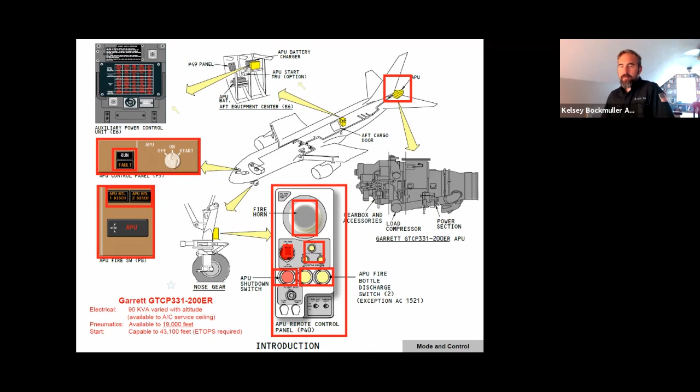Let's see, what else do we need to know? It provides 90 kVA to the service ceiling of the aircraft, and it is capable of providing pneumatics up to 19,000 feet, and it is capable of starting at 43,100 feet, which is an ETOPS requirement, which is the ceiling height of the aircraft. Any questions so far? Alrighty.

This is that E6 rack that I was talking about, and right here on the right you see the ECU, the engine control unit for the APU. This is the brain to the APU, and this is also where you're going to perform any BITE. You're going to have to come back here to the E6 rack, open up the cam locks, and interrogate this box to do a BITE check on the APU.

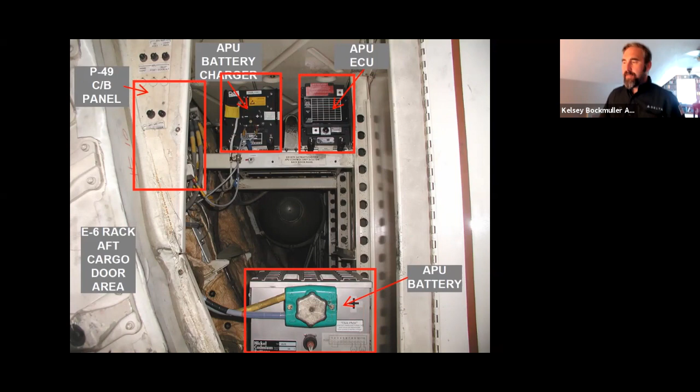This right here is, of course, your battery, and this right here is your battery charger. There's a bunch of stuff located up here inside this panel, a bunch of relays and a bunch of big heavy feeder wires. That is for starting and a couple other things. So you'll see a relay panel up there when you look in that compartment.

The APU battery weighs about 70 pounds. It is actually equivalent to a ship's battery. They are the same part number. There is really no good way to get it in and out of there. The best way to change it is to find a lift truck or a Wollard and get it right up into the door in the right spot, and you should be able to transfer it into the rack that it sits in and then bolt it in.

The second best way is to get a skyjacker. There again, the electric ones seem to work the best, and put the battery up on it and then just transfer it from the doorway of the skyjacker into the compartment. This aircraft was equipped with a few chain hoists. I don't think there's one back here for this, so it is going to be a manual lift. Sadly, you can only fit one person in there. So there again, you got to be capable of lifting the 70 pounds to get it in there.

Here is your P40 panel on the back of the nose gear. There again, shut off, bottle discharges, APU horn, and then of course the light. Biggest problem I've ever seen on this panel is the horn going bad. Pilots will write up that the horn isn't loud enough. You can hear it from the flight deck when it's going off, and they say it's not loud enough. So we've had to change out a few horns. I've done that a few times. But normally there's no problems with this panel.

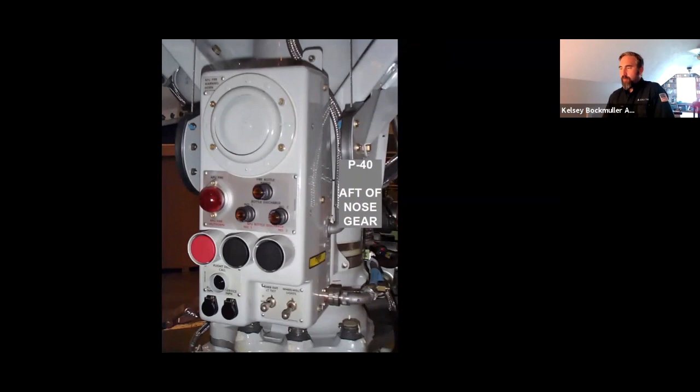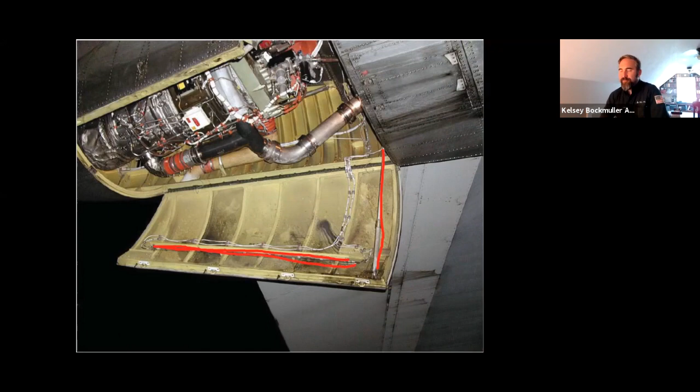This is also pretty thin metal up here, guys. It's really easy to dent and bend. So keep that in mind also.

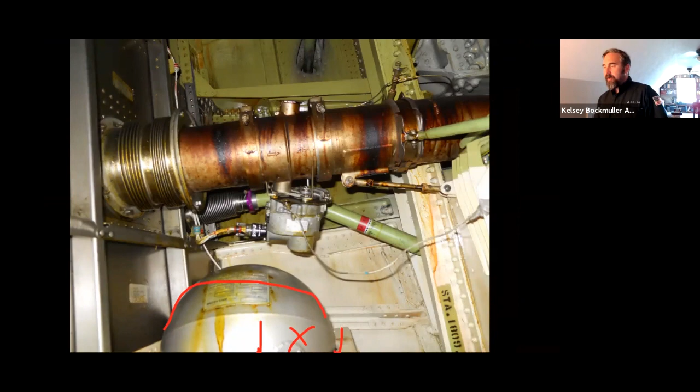And then this is the APU bleed air duct. This is the air duct that we're getting air from our APU on. This is the APU valve. If you look on your pneumatics panel, this is the one that says APU next to it. This is the one, when you push that button, it's this valve that opens.

And then in the background here, you can see the fuel shroud. Now, that's just a big pipe over a smaller pipe, but that is the shroud to prevent, in the event that the fuel line does start leaking, it will leak into the shroud, and then the shroud will take it down to the back of the main landing gear doors, where we have a drain mast that will drip fuel if it does have a leak.

Guys, this is a no-go item. If you have fuel coming out of that drain mast aft of the wheel well there, it is a no-go item. You cannot dispatch the airplane with that leaking.

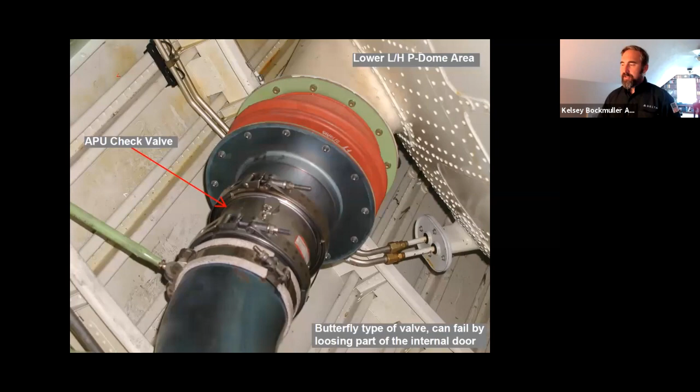This is a little further forward. You see it's right there in the P-dome area. It's in the forward stab compartment. And this is an APU check valve. It is a butterfly type valve, and it has failed in the past. They do get sloppy over time. You can imagine living back there and doing the job every day. The bearings get worn out, and the hinges get loose, and everything like that. So it has been an issue in the past, and we'll explain a little more of that as we get into pneumatics.

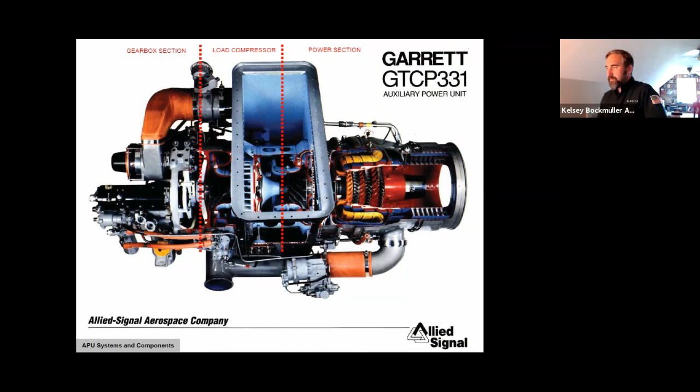Here you see a cutaway, a pretty cool cutaway from Garrett Allied Signal Company. And you can see how the engine burn is right here in this side of it, and then this is your load compressor area right here, and then of course your gearbox area. By the end of this lesson, you won't have a problem figuring this out. It's pretty cut and dry. We're going to look first at the gearbox and its accessories.

We have a cooling fan in the top. We have a generator, not an IDG, but a generator. Underneath that generator is a generator scavenge pump. We have a fuel control, an oil pump assembly, and finally a starter motor. This has got a big boot that goes on it, comes around, and then enters into an oil cooler right here. Okay, so that fan pulls air out of the inlet and runs it through the oil cooler. That helps us keep our oil at the correct temperature.

So this is real life, and here you see your cooling fan right there in front, and there you see your oil cooler, and then right here is your starter mounting pad. The starter has been removed for this photograph, and then right here you see the fuel control. Directly behind it, attached to it, is the oil pump and the lube assembly, and then of course this black thing right here is your APU generator, not an IDG.

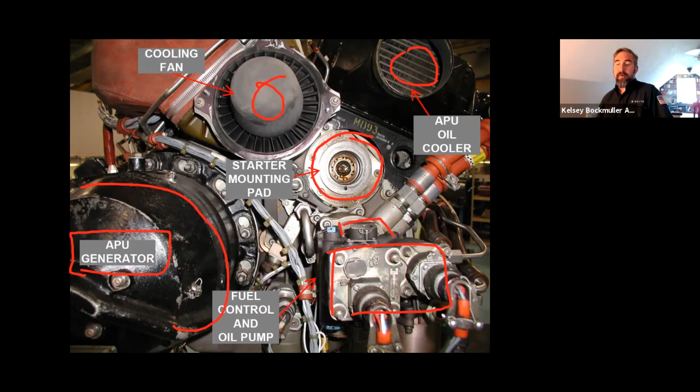Now, whose job is it to keep this generator on speed? What keeps the generator on speed? The GCU? Yeah, the ECU. The APU actually does. They run this APU at the correct speed to give us the correct kind of power we need off this generator. Okay. So they give us the correct speed.

Does anybody have a guess as to how fast this APU spins? It's quite unfathomable. Like 40,000 RPM or something. It is. It's like 40,000 RPM. It's actually 39,800 RPM, I think is what the exact number is. It's just shy of 40,000 revolutions per minute. Those 3 turbine discs back there I showed you, each of those turbine discs weighs about 30 to 40 pounds. They are super heavy. And if it's spinning that fast, I can understand why.

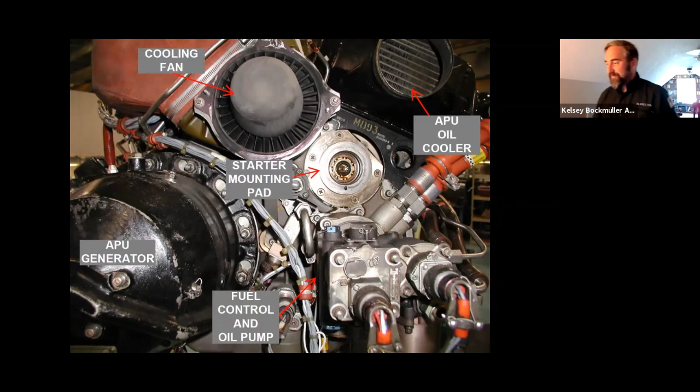It's pretty amazing. I can't even grasp 40,000 RPM. Don't even know what that looks like. Anybody? No. Okay. Yeah. Anyway. Lots of moving parts.

And we convinced them that we needed one in the training center. So a couple of the guys in the APU shop took it upon themselves to give us a stand and the APU, and they cleaned it up real good and put some unserviceable parts back on it for us. And now we have a beautiful display. We also have an ECU connected to it, an engine control unit. We can induce a couple of faults into it and make you troubleshoot it if that's what we feel like doing that day.

This APU is almost 40 years old at this point. There's not much we don't know about it. There's not much new going wrong with it. But it's been a pretty reliable unit for us. It does have its quirks. It does have its little things that we just deal with. And we'll explain those to you.

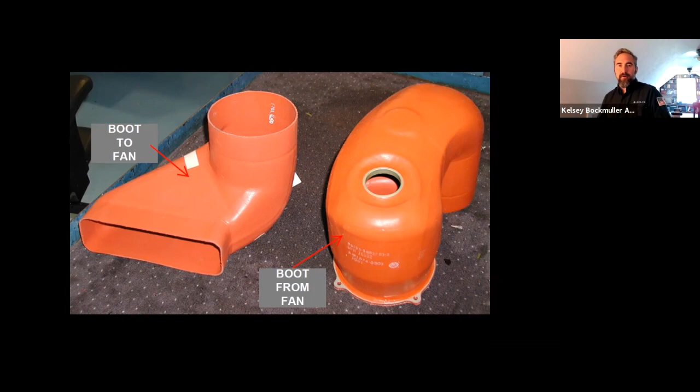These are your boots from your fan to your boot to fan and boot from fan going to your APU oil cooler. They should be intact. They shouldn't have any tears or rips in them, stuff like that.

Guys, this ECU originally came with a weight of 38 pounds. I'm told that this thing actually had glow tubes in it, glass tube transistors and stuff in it. It used to weigh 38 pounds. They've since modded it. It doesn't weigh 38 pounds anymore. And I think it's a little more solid state nowadays.

Either way, what you're looking at, though, is it does the start sequence. It's going to monitor your operation. It's going to monitor pneumatics. It's going to do shutdown control. It's going to do the BITE. And it's also going to do your predictive shutdowns.

Guys, everything on the left is what comes in. 28 volts, start on signal, ECS demand, environmental control system demand, fire, main engine start, air supply, inlet door, air ground, ADP, has the aircraft model coming into here so we know what it's installed on. Inlet guide vane position, EGT 1 and 2, speed 1 and 2.

Load compressor inlet temperature, LCIT. We'll talk about that in detail in a little bit. P2, which is pressure at station 2. PT, total pressure. I don't know what TP is. Oil temp, low oil pressure, starter power, generator oil filter, and fan valve.

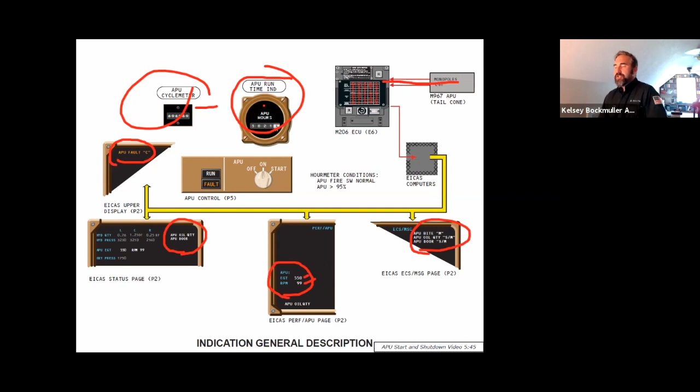Here you see the monopoles, or the EGT monopoles, and the EGT coming into the ECU and then going into the EICAS computers, again to be displayed on EICAS. We only get 2 parameters, and that's RPM and EGT. There was an upgrade for oil quantity. You can pay extra and get oil quantity. We're cheap. We can go back and check the oil. I think that's about what it comes down to.

Monopoles. We have 2 monopoles, and monopoles are going to measure the speed. We have monopole number 1 and monopole number 2. Number 1 is on the right-hand side of the aircraft. Number 2 is on the left-hand side. So do keep in mind that they do label this a little bit backwards. If you are going to change a monopole, make sure you get the right one. 1 is on the right, 2 is on the left.

There is a special socket, a monopole wrench, if you will, to remove the monopole. Looks like you could put a pair of pliers on it, a pair of hog jaws, and unscrew it. Please don't do that. It has a special knurled keyway wrench that goes on there to extract it. This monopole is about 8 or 9 inches in length, and it's got a bunch of seals along it, along with a threaded area down at the bottom, where it's going to pick up the motion of the APU drive shaft through a magnet. Any questions?

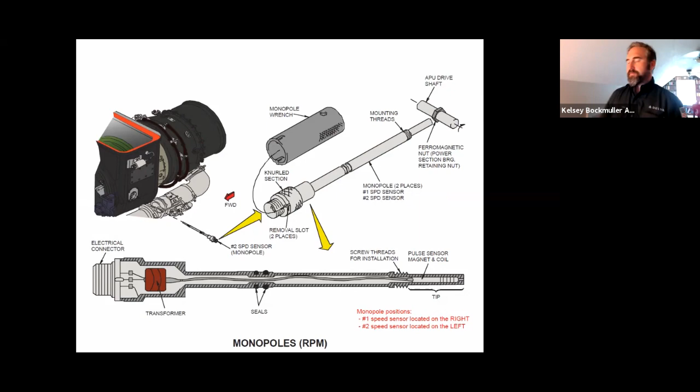This is speed sensor number 1 on the right-hand side, and there it is coming through the plenum. And then the other one's on the other side. It looks exactly the same. EGT thermocouples. We have 4 thermocouples, and we have 2 rakes. So there's 2 thermocouples per rake. If one rake fails, there's no effect on APU operation. If both rakes fail and we have not started yet, it will abort the start. If both rakes fail and we are running, it will turn off pneumatics, and it will not restart.

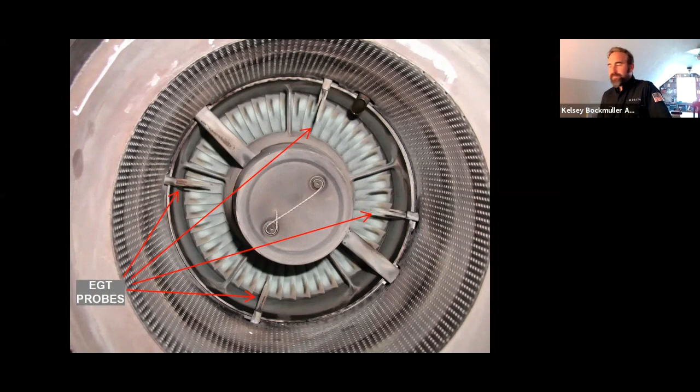It is a Chromel-Alumel sensing element, and of course, 4 probes wired into 2 circuits. There you see circuit 1, rake 1, and that's EGT number 2 on this side. And there you see the little probe sticking in the back there. Guys, this little disc right here, the disc that holds these blades, is what I was saying weighs about 40 pounds without the blades. That compartment is literally about the size of a large coffee can. Any questions on speed or EGT?

Guys, if you lose both monopoles, it's going to shut down. If you just lose one, it'll keep running. If there's a disparity between the 2 monopoles, it's going to assume it's at the highest one. Same with EGT. If there's a disparity between the probes, it's going to assume that it's on the highest probe.

Okay. Next up is lubrication for your APU. Guys, it's a pretty simple lubrication system. We do a couple of things here that I'll point out. The lube pump is connected to the gearbox, and then the fuel control is connected on top of it. So it's kind of a stacked unit. You'll see a good picture of that in a minute. We do have our cooling circuit.

We have had reports, I want to say it was Salt Lake, finding clogged oil coolers for their APU. And with everything that's happened in the last year and all the parkings out in the desert, this is probably something to keep your eye on. If you've got an unusually hot APU or it's faulting, you might have a clogged oil cooler. The air portion of that oil cooler could be filled with dirt and stuff. So keep that in mind. We did a pretty good job of taping them up, but you know how that goes.

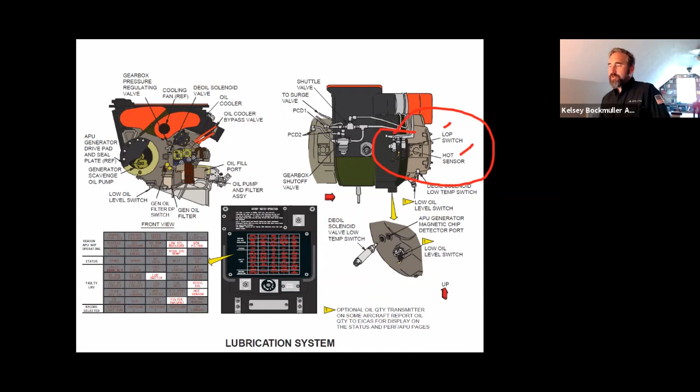On the side here, right here and right here, you're going to have the hot sensor and the lop sensor. Low oil pressure, high oil temp. They're located right next to the gearbox, just into the pneumatic section of the APU. We do have the generator, and we do have a dedicated generator scavenge pump, which is going to go into the dedicated generator filter.

Now, here's the deal. Hamilton Sundstrand made the generators and the IDGs, but the APU was made by Garrett, and they were competitors. Garrett didn't want Hamilton Sundstrand's generator to trash its APU, so they gave it a filter that is non-bypassable. If it develops differential pressure, it will actually shut the APU down. We'll talk about that in more detail. These components right here are for crankcase breather air going into the gearbox, and I'll explain that as we see more pictures.

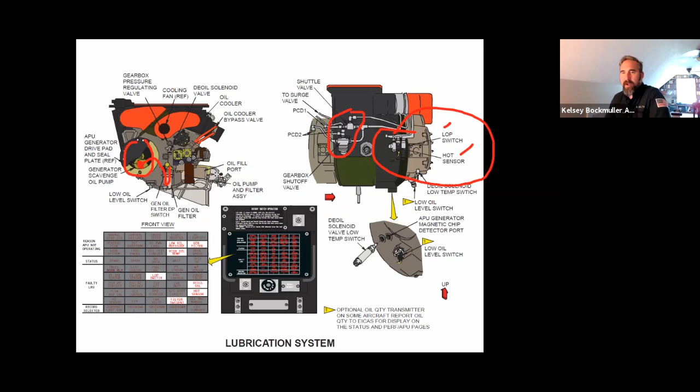The scupper is on the left-hand side, so if you drop the door, you can get right to the scupper. You cannot service the oil while it's running. You're going to have to pop the cap and pour it in with it shut down. There were provisions for pressure oil filling, but we don't do that at Delta. There is a sight glass that is virtually useless while the engine's running.

There you see the sight glass. There you see the scupper. This one, of course, needs oil. It's below the add line here. There's your full line. There's your scupper. Right here you see the oil pump area. It is mounted on the gearbox with a V-band, I believe.

Hold on. There's a weird loop in this thing. All right, there we go.

This is our oil compartment, and the reservoir is actually the gearbox. We're going to pull it down here, and we're going to run it through a pressure pump, and then we're going to run it through the air/oil cooler, and then back up and around through the filter, and then it's going to go out and do its work. All right, so we're going to send it here into the gearbox, and we're going to oil all of these things in here in the gearbox, and we're going to provide the oil to that generator.

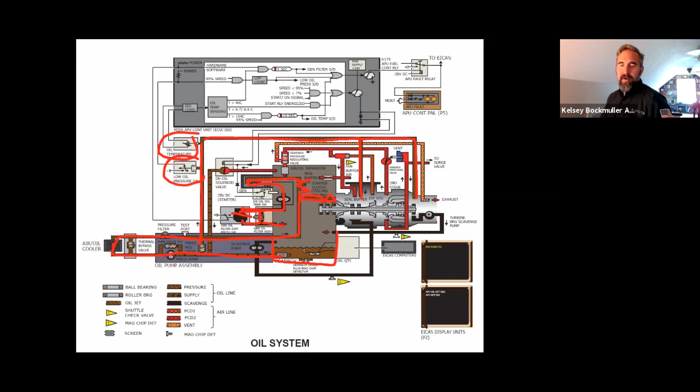And what we're going to do is we're going to fill up the top of this gearbox with a little bit of head pressure, a little bit of vapor pressure, or a little bit of air pressure, so that we keep the foaming down, so that the APU doesn't get all foamy inside there, and to help all the oil settle to the bottom. All right. Now, in addition to that, we're going to pull some of that pressure out of that gearbox, and we're going to run it into this de-oil solenoid valve that's going to come down here.

Now, what line is this coming from my gearbox? That's my supply line into my pump. So why in the world would I want to put air into my oil? Anybody? Keep it warm. When this stuff is cold, it tends to look like molasses. So if it's sitting at like negative 30 degrees for a while, it's going to look very thick and very syrupy. And what they're trying to do is not only warm it up, but actually introduce a little bit of air bubble into your oil. And by doing that, it starts to move a little quicker.

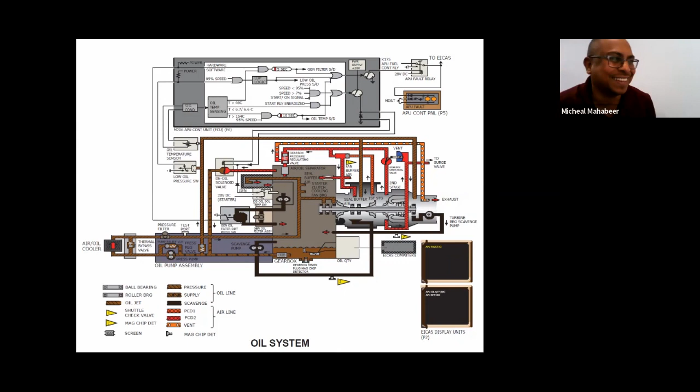And of course, I guess that probably all happened during COVID, didn't it? No. Not only did I go out and put airplanes back in service, but I took 2.5 months off. I took the leave of absence without pay. I figured I'd just sit at home, because they had us doing busy work, justifying our jobs, and I'm like, I don't do busy work. I can stay plenty busy at my house. So, yeah, I wasn't gonna play that game. Anyway, thanks for that, Michael.

Were you APUs on the other fleets, or? No, 757. On 757? Yeah, I'm on the 757, but because the two teams merged now, that's the reason why I'm doing this one, for Howard. Okay, gotcha.

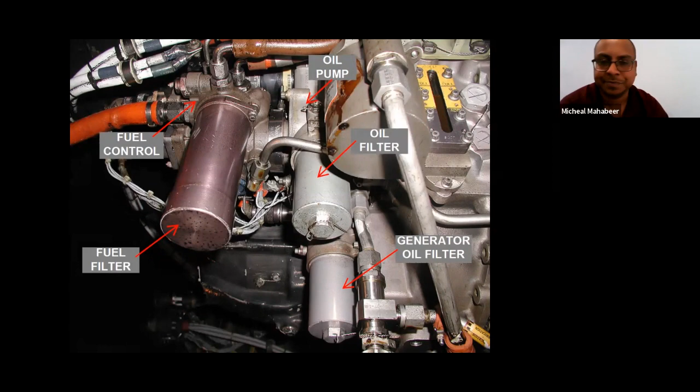This right here is your main oil filter. This right here is that dedicated generator oil filter. There again, this one is non-bypassable, and if it does clog, if it does have differential pressure across it, it will shut down the APU. The whole theory with Boeing and this APU is that if it can't make electricity, they want to shut it down. They don't want to even use it. So that's kind of where we're at there.

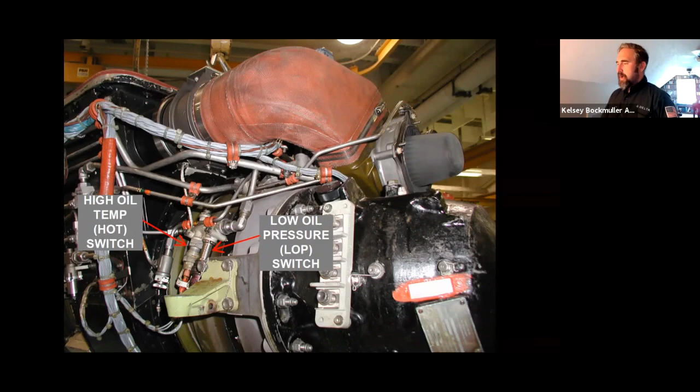What else? This over here on the side, you get a really good shot of the low oil pressure switch and the high oil temp sensor right there. So that's good. And then right here, we have our low oil switch in the bottom of the gearbox. And this is Jake's de-oil solenoid temp switch right there, the one that his buddy finds broken off. Chip detectors, a couple chip detectors. And this is your de-oil valve.

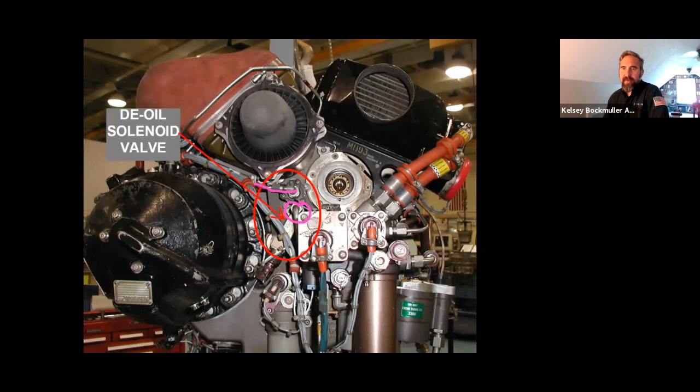All right, so this is your crankcase air going into the top of your gearbox on your APU. And then this right here, that is your de-oil valve. The next picture I have is going to be a little closer, so we're going to zoom in a little bit. And of course, there's your gearbox regulation inlet pressure right here. And then this right here is that solenoid, and it's connected to this tube. And this tube is going to take air and pump it straight into your oil pump. Right there's your oil pump.

This solenoid, if it's got low oil temperature, is going to open, allowing that crankcase air to run in there, to help give us a better shot at getting a good start, a good oil pressure after we get up to 95%. Questions, comments?

Guys, if you have a no in-flight start, because we do have to start these, what is it? Michael, you'll probably know better than me. Is it every 30 or 90 days now? I thought it was every 30 days for the ETOPS fleet. Every 30 days they do a start? They do an in-flight start? Yeah, primary altitude start.

From an altitude, and it's supposed to be at the top of descent. It's when they're still sitting up high, about to come in off the track, and before they start dropping down into either Europe or the U.S., they're supposed to reach up and hit that switch and try to do a start. Now, Michael's saying that they got instructions now to, below 10,000 feet, go ahead and open the door, just turn it to on for a little while as they're coming down.

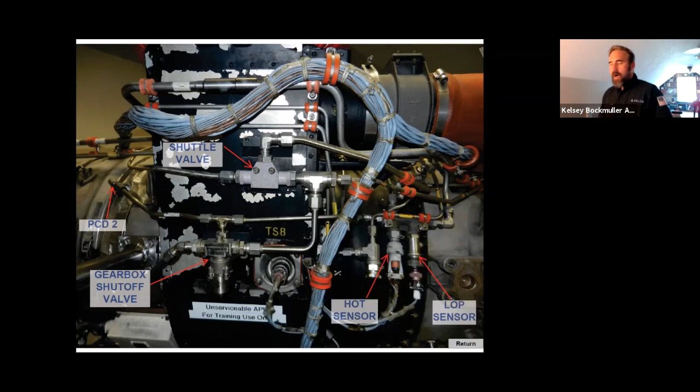I'm going to show you a couple pictures of the pressurization components. You see a couple of lines coming off the back here. There's the PCD2 pressure line coming in. I think one is right here. It comes up to the shuttle valve, and it all snakes around here. It's kind of a big mess, to be honest with you. You've got a shuttle valve here, and then you have a shutoff valve here for your gearbox.

At some point, your PCD1 pressure is not going to be enough, and they're going to have to switch over to PCD2 pressure. So that's why we have both 1 and 2, and this shuttle valve thing, and it's kind of a hot mess. But we typically don't have many problems with that. The problem normally comes with this de-oil solenoid right here.

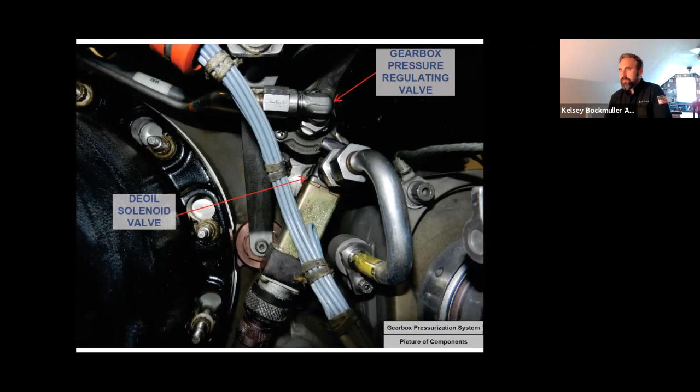Looking a little closer at this generator, we do have that dedicated scavenge pump that's going to run it through the filter before it goes into the gearbox, and it's 35 psi. If there is differential pressure across that filter greater than 35 psi, we go into a generator filter protective shutdown mode. And the temperature has to be above 46 degrees C, which is about 120 degrees, I'd guess. So as long as we're over 35 psi of differential pressure and over 120 degrees Fahrenheit, we go into protective shutdown mode. Back here there is a gerotor type pump to push that oil back into the gearbox.

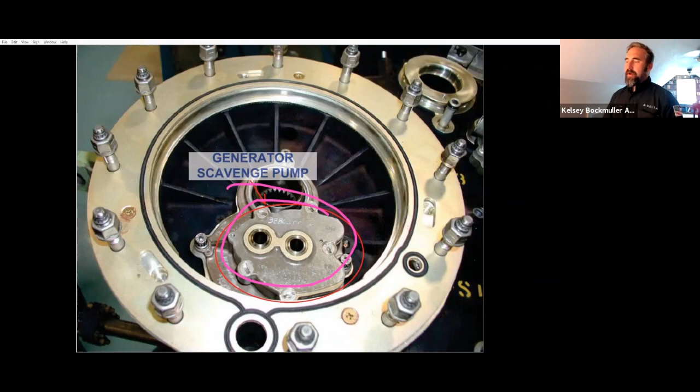And then, of course, we have a standard scavenge pump here for this mid frame assembly. This is that little tiny generator scavenge pump. The generator's been removed. You can see all the bolts. This is that pump right there. If you have a generator shut down and you pull this thing apart and the filter is full of metal, you're probably going to have to do a new pump too, along with your new generator.

This right here reminds me a lot of doing an MD90 APU generator. I don't know why. Maybe it's just that impregnated metal gasket thing. There was a picture of the rear gerotor pump. No big deal.

Moving on to fuel system. Fuel is used for combustion as well as hydraulic muscle. We have our fuel control unit, our inlet guide vane actuator, the IGV, and then our fuel flow divider and 2 fuel manifolds. One is a primary manifold, small orifice at about 100 psi, and the second manifold is the large orifice.

And then this fuel flow divider. Guys, if you've got a no start fuel issue, go straight after this fuel flow divider. I couldn't think of a more complex way to create a fuel flow divider than what they did. They've got an electric solenoid in there, 30 PSI check valves, 100 PSI check valves, continuous check valves. They've got all sorts of mumbo jumbo in there for a fuel flow divider.

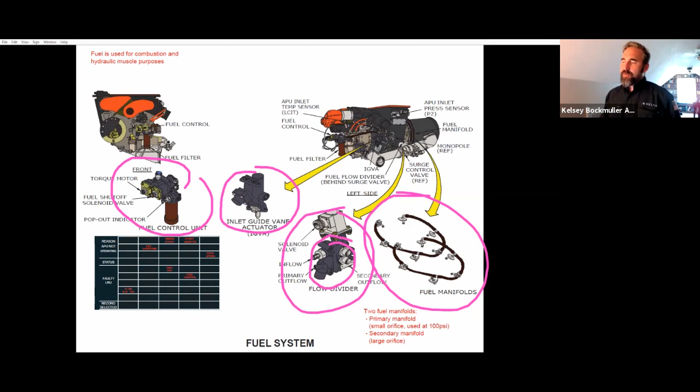If you got a no fuel start, knee-jerk reaction is throw a fuel flow divider at it. Inlet guide vane actuator. This guy right here changes our bleed air by augmenting our inlet guide vanes. And it is an electro-hydraulic servo valve that takes muscle fuel and then moves those valves. Okay? Moves those vanes to either give us air or take air away from that pneumatic section of the APU.

But on speed is considered 95%. It will have a modified acceleration schedule above flight level 30,000 for increased start capabilities. And I'll show you the starting in a bit. It runs at 100% RPM for normal electric operations and 101% when you ask for pneumatics.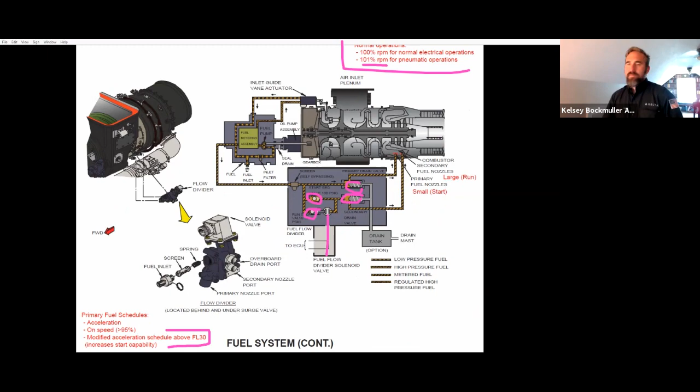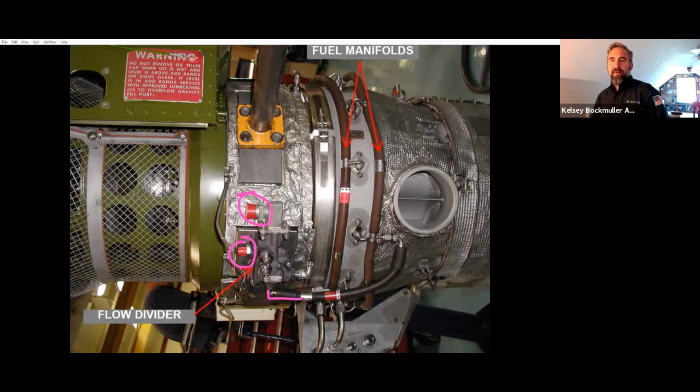This is that fuel flow divider, guys. Super easy to swap out. It's got 1 line on it, or 2 lines on it, and I think 1 cannon plug right there. 1 cannon plug right here, and there's the other line. It's held in by a couple of bolts. Super easy to swap out. There's a little closer picture of it there. It actually looks like it might only be 3 bolts.

Guys, we have a set of drains and vent assemblies here for our oil galleries and some of our components. Not really a big deal. We do have some telltale drains. You can open up and look and see what's leaking. We do have this drain mast that bolts onto the side. This is going to be different than the 757

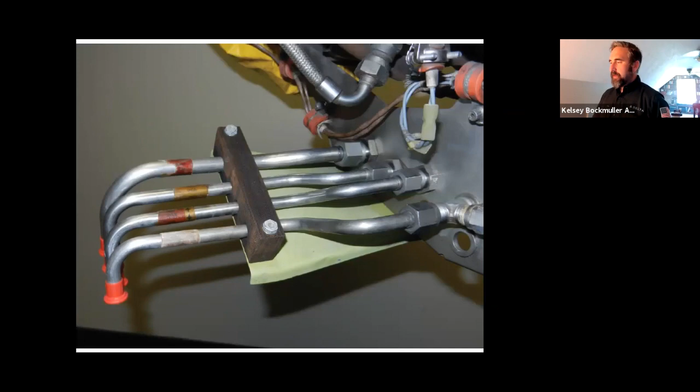as far as configuration. The air intake system, there again, is going to come in over the top, right in front of the horizontal stabilizer section box. Believe it or not, you can trim that stab all the way up. And that makes a really nice platform. You can sit up there and work on the inlet door actuator pretty easily. It helps to have somebody else with you so they can run your tools up and down rather than hucking your toolbox way up into that compartment. If I remember correctly, it takes some weird sizes, some bigger wrenches and stuff to do that door.

The plenum is a composite material, honeycomb, fiberglass, all sorts of stuff. You're going to have to inspect it during an APU change, so don't forget to do that. This is the intake plenum of the actual APU. This right here is the kiss seal that you're going to squeeze it up against. Little note, there is an inspection door right here that you can pull off, and you can look inside there without pulling the whole thing down. Guys, do take a look for debris, especially if you got a no rotation or no light off. You can pull that door open pretty quick, look for debris in there.

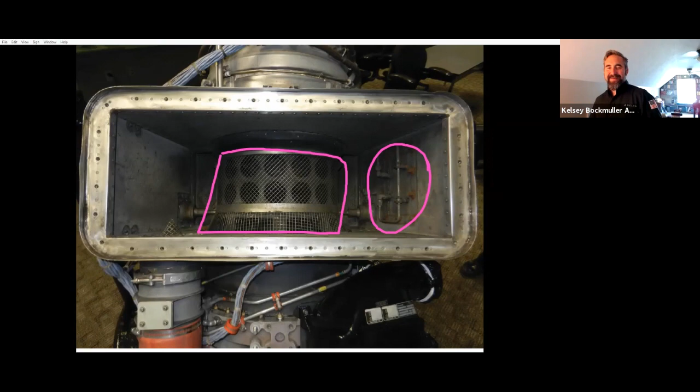The guys in the shop tell me a story that they had a carrier, a Middle Eastern carrier, send us over an APU one year to have us look at, and they'd had problems with it. And the guys got it in, they got it off the truck, they started to evaluate it and inventory it. They took the top cover off. And when they took the top cover off, they found a dirty dinner napkin laid exactly over this square area right here. The story goes that they took that dinner napkin off, checked the oil in it and sent it over to the test cell, and the test cell fired it up, and it ran just fine. Called them and told them what we'd found, and sent it back to them, unoverhauled, if you will. Guys, don't forget about the easiest thing first.

There's also a story, Abe, rolling around out there where there was a cabin cleaner standing on the back of the truck there on the back of the airplane, and they were for some reason jacked up to the right side instead of the left side. But the cabin cleaner was standing back there, and he motioned to his other cabin cleaning buddy. He says, "Hey, watch this," and he grabs an empty trash bag and throws the trash bag up in the sky. And, of course, it gets by this door and just sucks right in with the APU running. And evidently the guy got about 2 bags into it before the mechanic could get up there and get a hold of him. Tell him to stop doing that. You will find debris in these compartments.

So, yeah, definitely take a look, see what you got. The one incident I told you about checking the inlet plenum, we had a FOD out of an APU. The boys replaced the APU. They put the new one up. They fired it up and FOD'd out the new one.

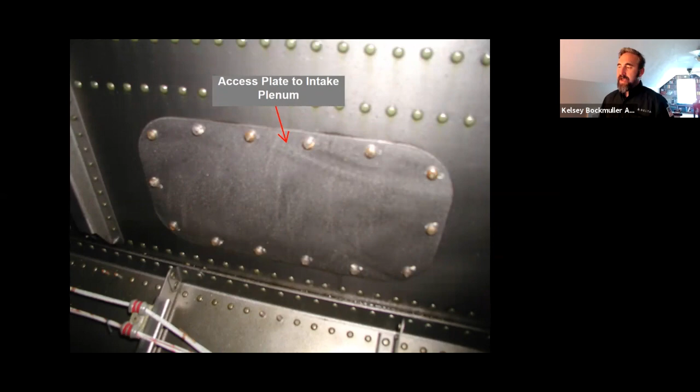And that was because of the intake plenum being disintegrated and coming apart, it eating a bunch of material from it. So make sure you do that inspection. There's also a plate here in the aft stab compartment where you can pull this down and do a look of the intake plenum there too.

This is another screen going into the fan. That's the fan screen there. This right here is damage that happens during removal, and it's one of the biggest gripes to the line guys that the APU shop has.

I worked with a guy named Dave Monroe, or is it Dave? Yeah, Dave. No, not Monroe. McIntyre. I worked with a guy named Dave McIntyre, and he left Delta North after I'd been there for a few years. We worked together quite a bit, and he was going to shop life. He was tired of working weekends and nights and holidays, and seniority at Delta North is still at 25 years. So, anyway, he was going to go to shop life, and he's in the shop.

He's in the APU shop, and he's like, "This is the number one thing that annoys us that you guys do out there." And what happens is that beam that I showed you that you got to tie off. That's how this happens. As you're lowering the APU with your winches, of course, all of a sudden they're going to go light. And as soon as they go light, everyone's going to stop, stop, stop. And inevitably, somebody's going to take it and try to shake the APU, try to get it to break free.

And what they're doing is they're actually hanging the APU on this lip right here. This lip right here has got a double bend in it. That right there is a 90 bend, and this is another 90 bend to make up the corner. It's a piece of sheet metal that has to be stamped and then heat treated and then welded in and all sorts of nonsense.

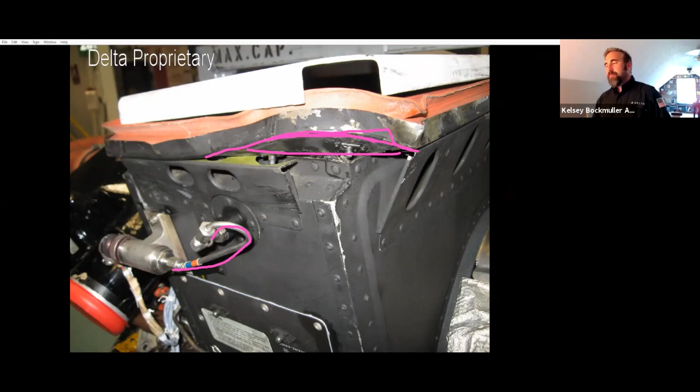Not to mention you also mess up the P2 line. But this is something that's completely avoidable on the line level when you're removing these things. So just keep that in mind, guys. Make sure you have clearances when you're pulling this thing out.

Your intake door has a switch on it so that we know when it's open or when it's closed. It is an actuator installed in virtually a coffee can. You can manually open or manually close this thing if you need to. The intake plenum is made of Kevlar graphite fiberglass composite. So there's that.

It's not a bad door actuator to change, although I've only ever done like one of them in my life. That's not to say that we don't have a bigger problem than that with them, but I've only ever had to do one. Any questions about that? Everybody good? Cool.

Next is ignition and starting, and what we have is our APU control unit, and it is going to go to the ignition unit and tell it to energize at 7% and then de-energize at 95% once we're running. The ECU is also going to get our door to open, which we see there.

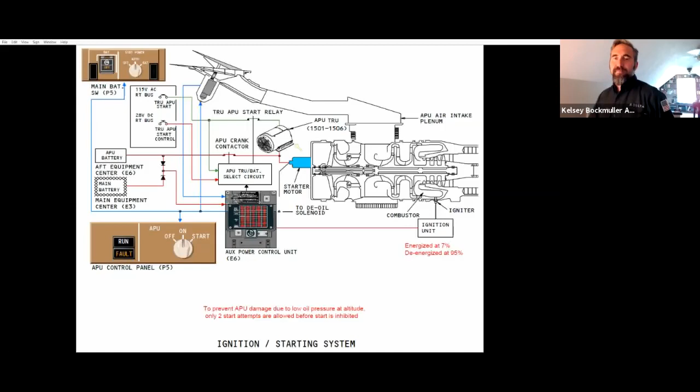It also gets power from the battery. It's going to provide the starter motor signal to start the APU. There is no TRU left on the 767. All the airplanes with TRUs were retired, so that's gone.

Let's see. This is your starter right here. It has a brush wear window. It has a crank pad that you can unscrew right here, and you can hand crank it if you're doing a borescope or whatever of the APU. There is a packing here.

Inside of here is something called a Sprag clutch that the APU shop doesn't want you messing with. It requires some special tooling and a special setup. They want the engine troubleshooting team to come out and do it. So if you do change out a starter motor and you look at the Sprag clutch and it is bad or there's a problem with it, they want you to call them out to fix it. All right.

Here's something else that's really important. Michael's probably been involved in this too. The starter duty cycle is 3 attempts, followed by a 60 minute cool down.

Guys, I know exactly how this goes. Pilot comes in, he lands, he starts his APU, it doesn't start. At some point during his taxi, while he's sitting waiting to cross a runway, he's going to reach up and try it again, because he wants his APU running as he pulls into the gate, because that's what they're supposed to do. It's not going to work then either. He's going to call it in while he's waiting at the next taxiway to get clearance.

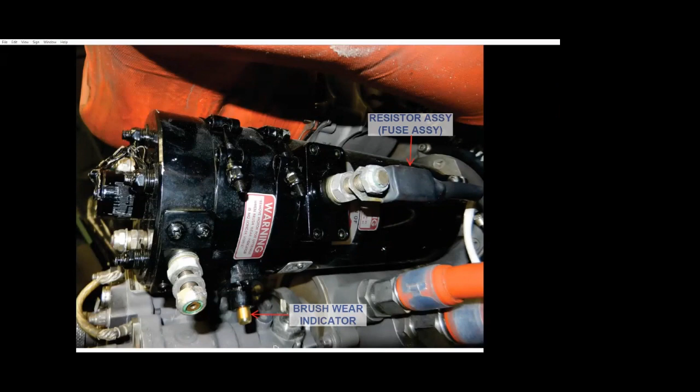This is the cover removed on the back, so that you can either hand crank it, or if you want, you can try to hand start this APU. Get yourself a big drill with the socket on the end of it, put it up there, and try to do a hand start. Remember, you're going to get up to around 40,000 RPM, so just be aware of that.

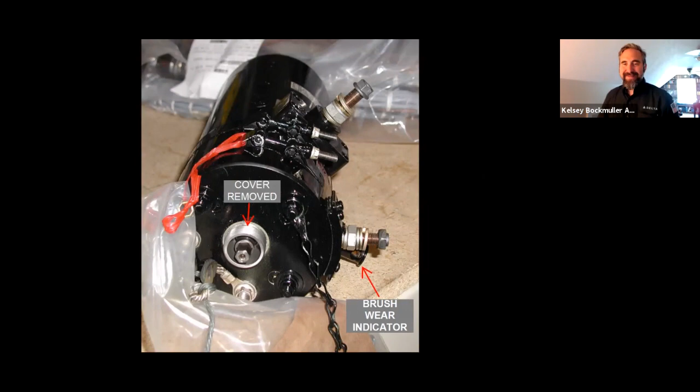I'm kidding. No reaction out of some of you. Are you even listening?

Anyway, inside of here is your sprag clutch. There's some funniness in there. They don't want you messing with it. Call it out if it's bad.

I don't like this start graphic, but I'll kind of go through it a little bit with you. First, we're going to energize the de-oil solenoid if the temperature is below 25 degrees Fahrenheit. At 7% of rotation, the ignition is going to energize and the fuel solenoid is going to come on. And then somewhere around 42 to 55%, depending upon our altitude, we're going to de-energize the starter, and the de-oiler is going to be de-energized.

At 85%, the fuel flow divider solenoid will be energized. And then finally, at 95%, APU power will be available, the ignition will turn off, and the run lamp will be on.

A failure of the de-oil solenoid valve will create a slow or hung start, but the ECU will fault the oil temp switch or starter. The ECU monitors the electrical system only. To assist in the starting sequence, ambient air is directed through the de-oil solenoid valve to de-prime the pump, unloading it for an easier start. So those are a couple of caveats there.

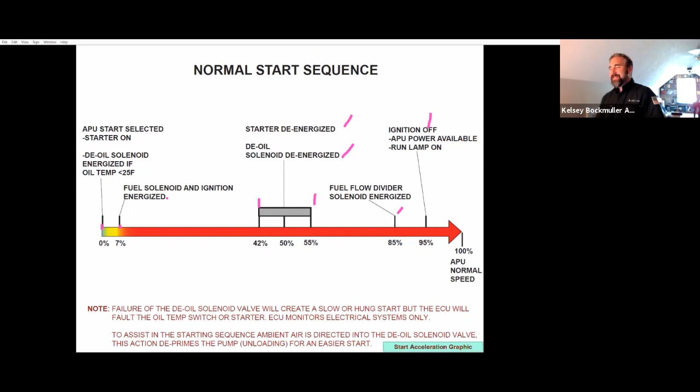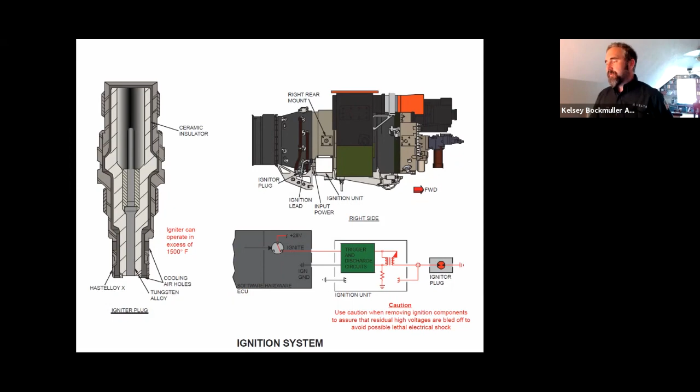These igniters are just as dangerous as a regular engine's igniter. They do put out a lot of voltage. It can be a lethal shock. There's your ignition unit. There's a single ignition plug. It does have an exciter. It is very dangerous. And that's really it for the ignition. Any questions?

Remember, this is late 70s technology here. It's not very good. It can say low oil pressure, and it's going to tell you that the LOP is bad. Is the LOP bad, or is it just out of oil? Which is it? Don't use this to troubleshoot. Use it to get your idea, to find out what it says, but then go to the FIM. Don't read anything into this faulty LRU business. Go to your FIM.

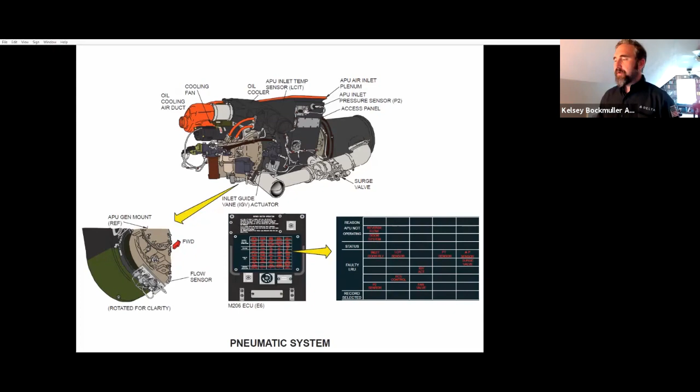We got a couple of sensors we're going to deal with here, and the first one is the LCIT. It is the load compressor inlet temperature sensor, and it is to protect the APU from reverse flow. As we take cold air and compress it, what does that temperature do? It goes up. If that air starts to back up in that compressor and this LCIT sensor gets hot, it's going to shut down the APU because it's protecting for reverse flow. It senses compressor stalls through high compressor temperatures and reports them to the ECU to initiate a protective shutdown. You're going to hear the dreaded sound these APUs make when they shut down.

If the LCIT fails, you're going to lose the sensor. It is an LRU. You're going to have no reverse flow protection, no surge protection, and they're going to use P2 for a substituted value. Now, the next sensor is P2, pressure at 2. It is an LRU. It's got a programmed value of 13.66 PSI.

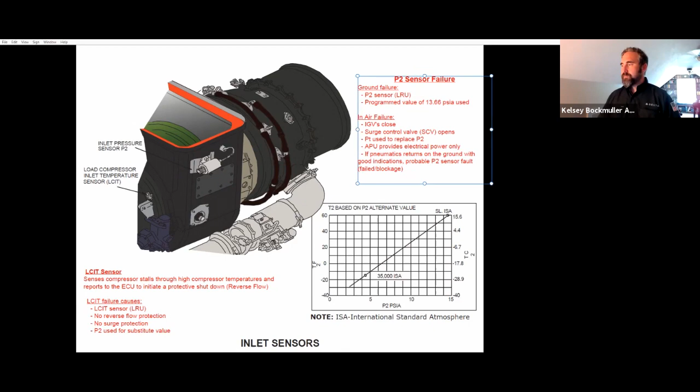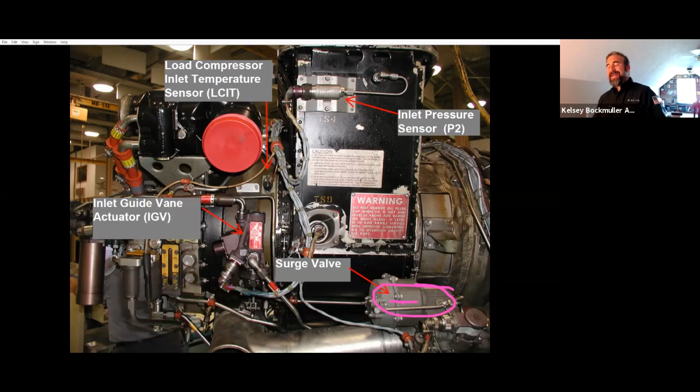It's electrically controlled, but it's powered with what? Fuel. Fuel. Yes, fuel. I'm sorry, did you just say fuel or pneumatics? It's not fuel. It is pneumatics. I'm sorry, I got distracted. It is a pneumatic actuator. It is electrically controlled and pneumatically actuated. Now, on the 767-400, it is muscle fuel based. It will run off of muscle fuel.

You'll know this sound because it's called an APU drone. And the APU will drone. It'll be wandering back and forth. It's trying to find its happy spot. And because everything's so sloppy, it moves, then it moves too far, and it moves it back. And that's what creates that droning noise. And at the same time, the surge valve is opening and closing, trying to regulate its pressure. So it kind of turns into a hot mess.

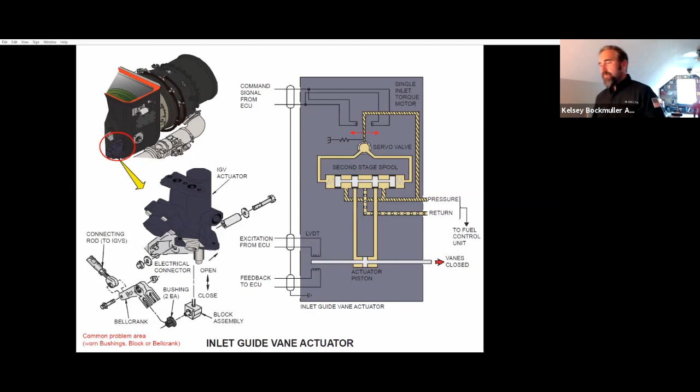But it's a pretty quick check. Guys, all you've got to do if you've got a problem with this thing is pull these two bolts out. There's one bolt there, and there's going to be another bolt down here at the bottom. And you can put your fingers on all these pieces, see how sloppy they are, and make sure they're in good shape. So checking for worn parts on this is pretty quick and painless. Highly recommended for an APU that is having issues with pneumatics.

This is that inlet guide vane assembly. It's kind of cool. I wish I had an opened up picture of it earlier. But there is a series of gears right here all the way around this unit. And then there is another gear up here. And as this arm moves back and forth, all of these gears move, and they open them all up and close them all up at the same time. It's kind of a neat little thing.

I will go ahead and tell you that you are not allowed to break this rod end off. This rod end right here stays. You might be able to get that bushing out. I'm not 100% sure. But if something's the matter with that rod, you're done. You've got to change the APU.

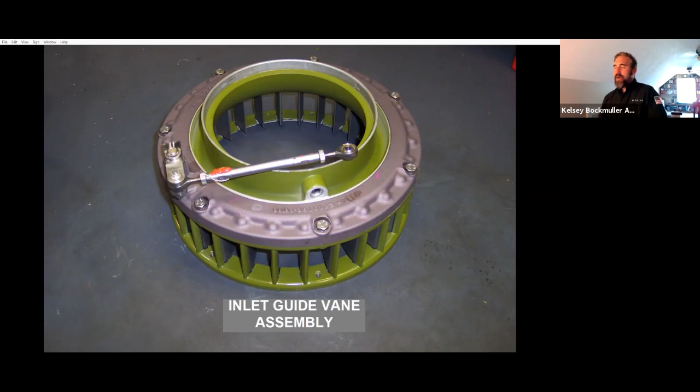Moving on to the surge system and the control, we have a differential pressure transducer. We have a volumetric chamber right here, and then we have a total pressure transducer. And what we're looking at is the volume of air coming out of our pneumatic system, and we're trying to regulate it. Okay? All of these sensors go to the ECU.

The ECU is then going to come back and give the surge valve a command. And of course, we're using muscle air, PCD2, for that. And then we're going to exhaust the extra pneumatic air into the APU exhaust. So based on these sensors, PT and PS, and the volumetric chamber there, we're going to set the surge valve position. This is known as a pallet. Okay, all the sensors are typically changed all at once.

The surge control system will fail open. APU will run, but you just won't have enough pneumatics to do anything with. If the surge control system fails closed, it'll detect reverse flow, and then shutdown will be immediately after. All right.

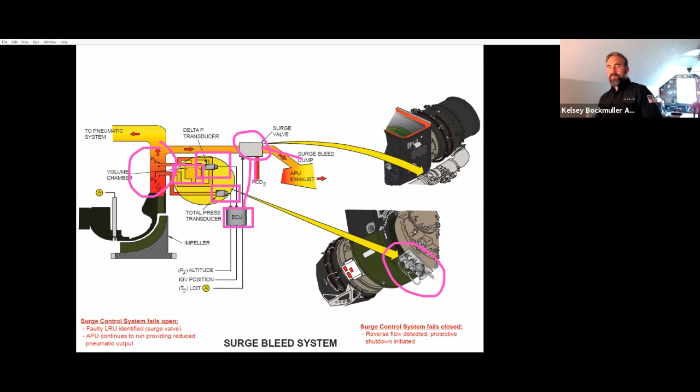So pneumatics problems, you can look at your inlet guide vane actuator, but more than likely you're coming after the surge valve or that pallet. There's a good picture of our surge valve right there. There's your electrical connector. And then, of course, you see your pneumatic lines on here.

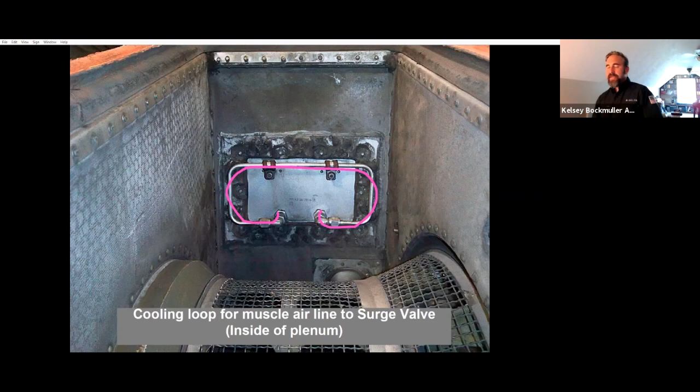This is a cooling loop for the muscle line on that surge valve right here. We're going to take that PCD2 air, we're going to run it around the APU through this cooling loop and then down to the surge valve. This is it removed. Here we are doing a little inspection of it there.

Now, it used to be that these sensors were all located and individually attached to the bottom of the APU right here. Guys, we did away with that a few years ago, and they put everything on a pallet. So now everything is one. Here's the other thing they did is they took the lines off of these sensors. Okay, so when you order this piece, you get a piece of sheet metal with all these sensors mounted on it

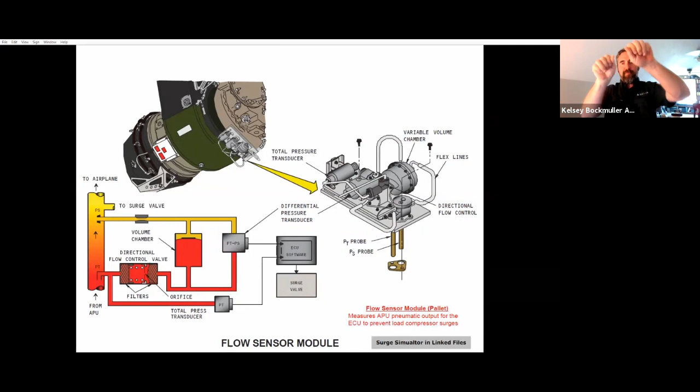with no lines. What you're going to do is disconnect the lines off the sensors up there on the airplane, pull off that pallet, put this pallet on, and then put the lines back in the sensors. Here's what they don't want you doing. They don't want you pulling these lines off because the gaskets were getting doubled up.

And the depth that this static probe would stick into the duct would now be in a different spot, thereby causing an inaccurate reading and causing the ECU to mess things up because it wasn't getting a good reading. This is something that we've seen over time, and they've changed. I believe on one airplane they had 3 or 4 O-rings or gaskets packed up in there. So of course that sensor was way down low in the duct and giving us a faulty reading.

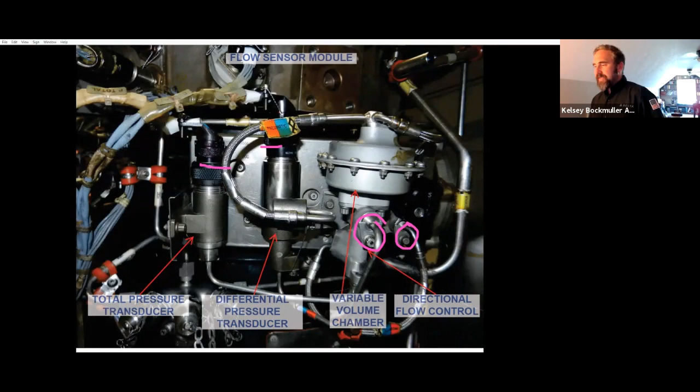Okay, that seems to be the latest and the greatest thing we've heard on this. This is the pallet configuration. These right here are the hoses that you're going to be pulling out. Right here and right here. I think there's another one. They're the Cannon plugs. But that's the pallet configuration. As far as I know, the old style, where they're all individually mounted, those have all gone away. They've all been modified.

Mike, is that something you chime in on, or was that before your time? I don't know what it is for the 767. I know the 757 that is true, and it was a legacy of Northwest. Can't hear you.

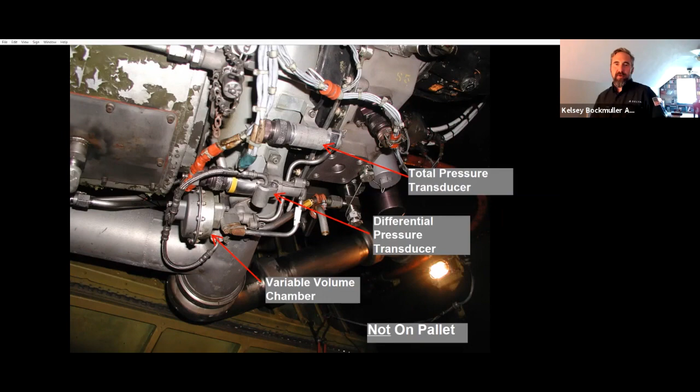I said that I'm not too sure of it for the 767, but I know on the 757 that is the case, and it was a legacy of Northwest. And it also had to do with the ease of changing out some of those components. A lot of damage was incurred changing out individual components. It was easier to just put the pallet as they have it right now. Okay, thank you. Like I said, I think I've been told that the whole fleet's been done. The odds of you seeing this will probably be on someone else's airplane kind of situation.

Guys, all in all, this thing does do protective shutdowns for us. If we lose both speed sensors, protective shutdown. EGT circuit, we won't restart. We will keep running. Overspeed, overtemp, the high oil temperature, the low oil pressure. If you lose DC power, you unlatch your battery, it's going to shut down. If the door doesn't work, it'll shut down or not even start.

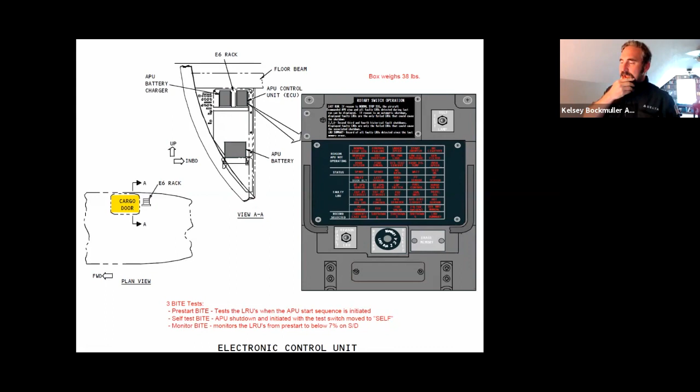So their answer to everything, if something goes wrong, is to shut it down. It is an auxiliary power unit. So, as I said before, there are 3 BITE tests. There's a pre-start BITE; it'll go through a sequence. There's a self-test BITE; it'll go through a sequence when you move it to self. And then there's a monitor BITE from pre-start to below 7%.

There is also something called a mini flag. And that's what the front of the panel looks like. What happens is you have to turn your head sideways with the APU running. If you hit the lamp switch, you get the mini flag test, and it'll start giving you codes. Okay? Now, these codes are a little hard to see if you've never had to look at them before. But this one right here, that's a bad one there.

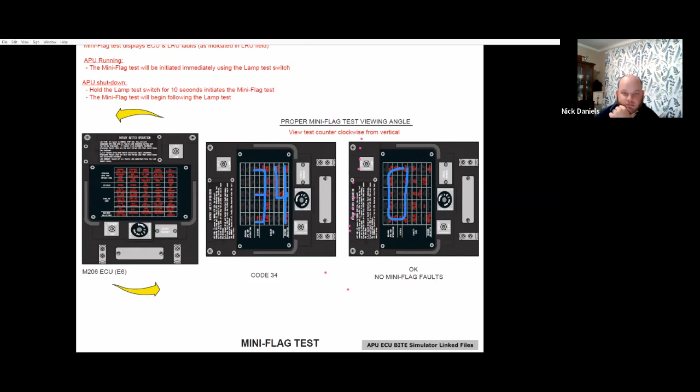Let's see. Let me try to use this bright blue. See what happens. So this one here is a what? 34. Yeah. And what does this one over here say? Okay. And that's true, it does do those. And now you don't know exactly what they mean. You got to go decode them. But more or less, it'll say, okay.

Guys, if you have trouble reading this and it's nighttime, grab yourself a piece of paper and lay it over the screen, and it'll glow with the number. A lot of folks have a hard time reading through the noise, and what that paper does is it takes all that noise away and just lets you look at a clear white background to see the number glowing through it.

How many people think I'm pulling their leg? How many people are like, no way, you're making this up, Kelsey? Come on, Derrick, are you looking at me that way? Yeah, you are. There's always one Thomas in the room. Guys, seriously, I had a student who a week later was still arguing that I was full of it. He finally had to have a student from another class who wasn't in on the joke go, is that really like that? And he's like, yeah, it is. And it is. It gives you these flags. It is true. I'm sorry, Derrick.

But this was their idea of a BITE panel back in 1979, when they were building this thing. And Kelsey, just as an FYI for the guys who may be doubting still, in the FIM, when you go to the APU BITE and it asks you to read off those mini flags, it tells you to tilt your head in order to read them off. So it's there in the manual. We're not making it up, Derrick, I promise. It's more of a, I can't believe they did it like that.

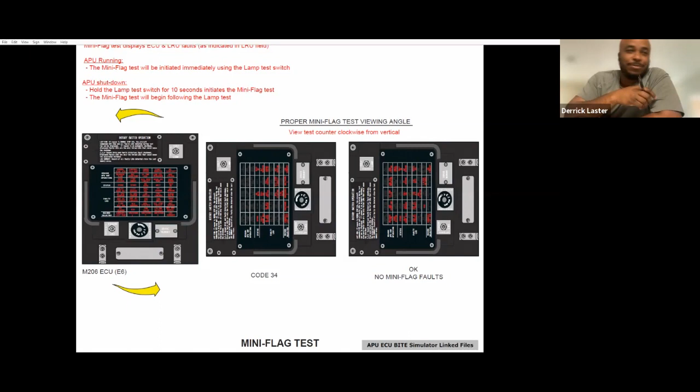As I normally say during the opener of class, this device right here is smarter than the whole airplane. This one cell phone has more computing power than the entire airplane combined, with the exception of IFE. Think about that. So you think they're gonna eventually start routing all the problems to a phone? I doubt it. I have to disagree on the IFE thing because my iPhone has never failed me, but IFE breaks like every flight leg. I've never had to defer my iPhone.

Well, have you been on the new IFE yet, Jake? Yeah, I work the 220 a lot, and that was Delta Flight Products. They've kind of got it figured out now, but in the beginning that plane couldn't take off without an IFE issue. So the new IFE on the 767-400 is really stable. I'm actually quite impressed with it. It came out right as COVID hit, it's all in service now, and they're just starting to mod the 300s to the new interiors too. So that's all good news.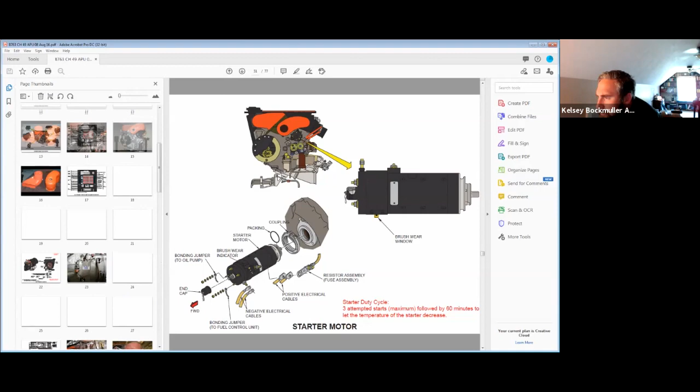I got one video to show you guys before we back up out of this. I don't know how I missed it. Intake door indication. Let's see. And actually, I'm pretty sure it's a test question here.

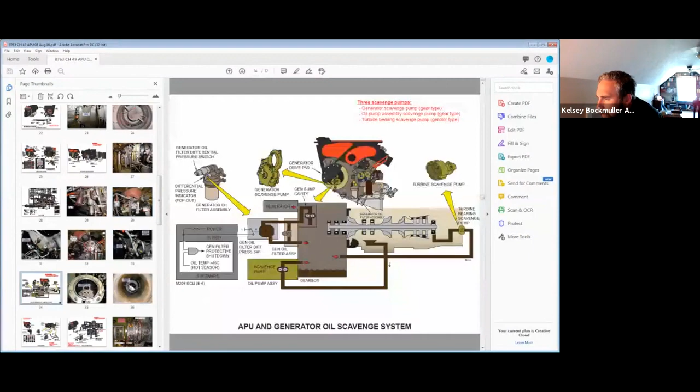All right, I tell you what, let's not do it that way. Let's do it another way. Linked files. There we go. APU normal start.

Chuck Bauer here, Tech Ops Training 767 Group. Today I want to discuss starting and shutting down our APU. I want to start out with two scenarios. The first one, the aircraft is dead and we're going to use the ship's battery to start the APU. The second scenario is we're going to have external power available, but we need the APU for maybe pneumatics or something else. So we're going to go through those two scenarios.

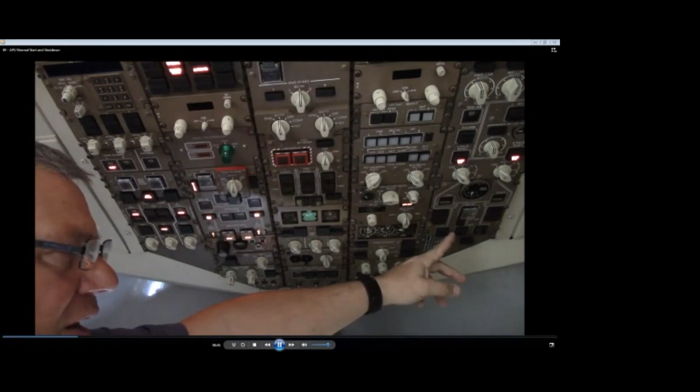We're going to start the APU with only ship's battery. First thing we have to do is select our battery switch to the on position. We have our discharge light, standby power in auto, and then we want to make sure that our APU shutoff valve is in the closed position.

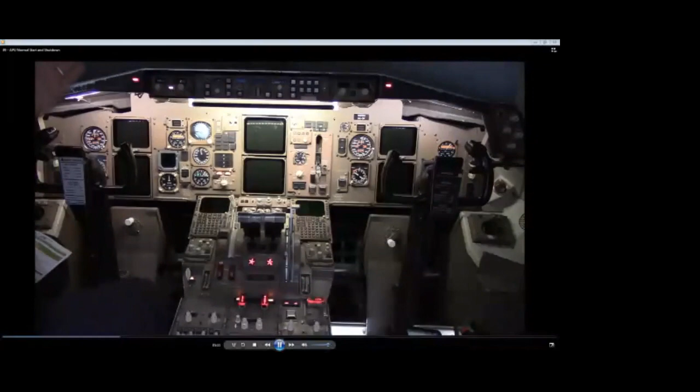The next thing we have to do is test our fire detection system to make sure the APU fire detection system works. When we do our fire warning, we want to make sure we get our APU fire handle, our light on the P1 panel, and our warning on the left and right sides of the glare shield. And you'll also get the fire bell.

After we do our fire detection test, we want to come over to the P61 panel and do our squib test. We select test 1, ensure that our APU squib illuminates, and it does. And then we go ahead and do test 2, ensuring that APU light illuminates. We did a good squib test.

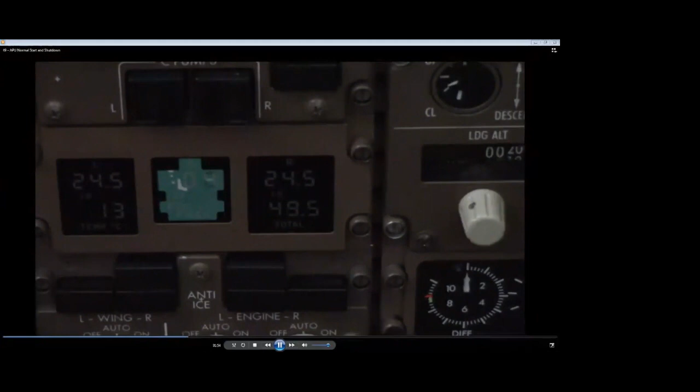The next thing we want to do is verify we have enough fuel in the left tank. We look on our fueling panel, left tank, and you can see right here, we have approximately 24.5, plenty of fuel. The minimum that we need is 1,000 pounds. You can expect to burn about 500 pounds an hour.

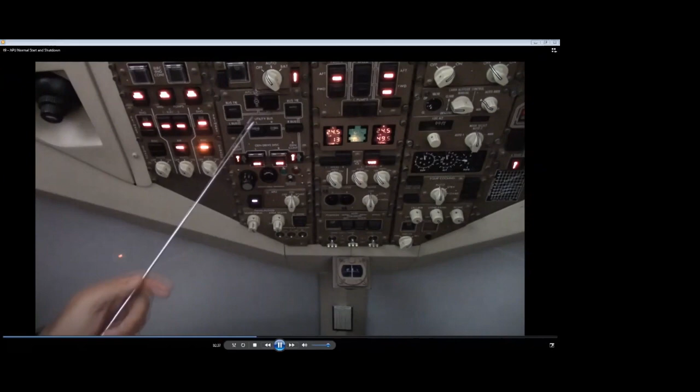When we do get to 95%, our run light will come on. Because we have the APU generator selected, it will come on at the same time, so the aircraft will come alive when it starts. As you can see, our run light has illuminated, and because we have our APU generator closed, we have power on our aircraft.

The run light has illuminated, meaning the APU is up to speed, 95 or greater. And if our APU generator is not selected on, all we have to do is select it on, and our aircraft is now powered by the APU generator.

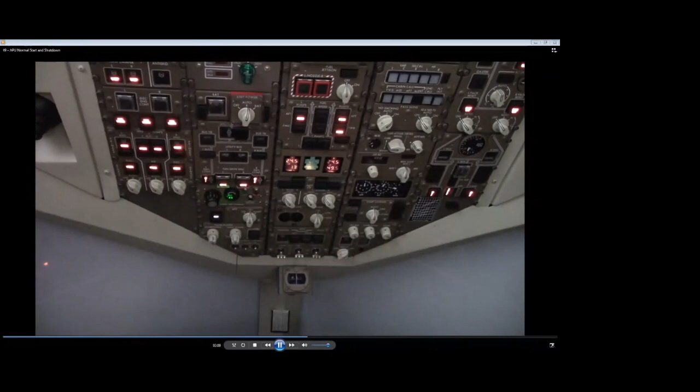If we desire to turn on pneumatics, all we have to do is select our APU air, valve opens and closes, isolation valves are open, and you can see we have air in our system.

Let's go ahead and do scenario number 2. We have external power available and on. We've gone ahead and did our pre-start checks. We're ready to go ahead and start our APU. But the great thing about having power on and EICAS available is we can monitor it. You can see our EGT and our RPM.

So we're going to go ahead and start. When we start, we'll go on, start, fault light will come on, and you can monitor right here as the RPM increases to 15%, you'll see the ignition and fuel will engage. As we get closer to 95%, there's our run light.

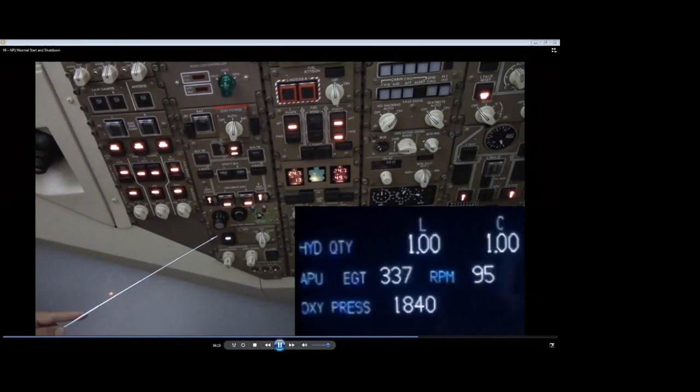We turned off our pneumatics. Now we're going to go ahead and turn off our APU. But before you turn off your APU, you want to transfer power, if it's available, from the external power. Go ahead and select it. Now it is on. If you do not, and you shut down the APU, you'll go in the dark.

So what we have done now is we're shutting down the APU. It will go into a cooling cycle. And what you can see right there, the EGT is dropping off.

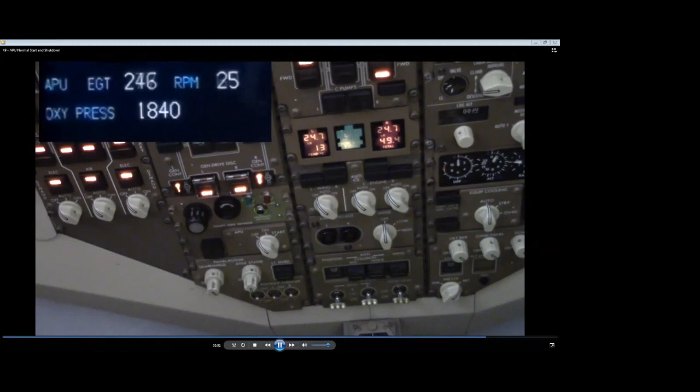When the speed reaches 15%, you will see our fault light reappear, cycle through. That is initiating from the fuel valve closing, and our door is also closing at this time. And we've just shut down the APU.

All right. Did y'all get the test question out of that? What does the fault light mean? The flashing of the fault light. Fuel valve. Fuel valve. And when does the run light come on? 95%. Perfect. All right.

Let me take care of some business real quick. I didn't want to do it while we were watching the video. Anybody have any questions in their book while we're waiting for my computer to work?

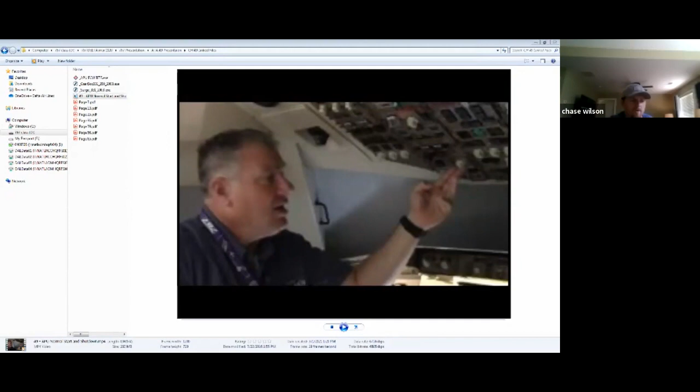After a protective shutdown, how do you restart the APU or reset the APU? You're going to have to go back and do a BITE. You can also pull and reset the circuit breaker to the controller, or turn off and back on the airplane. It's got to get that power cycle there to kind of clear its memory.

The APU BITE has appeared on the EICAS message page. What does this message indicate, and will the APU start or run? I heard some noise. I didn't really make it all out. Question number 7. The APU BITE has appeared on EICAS message page. What does this message indicate, and will the APU run or start? What page did it come up on? Maintenance? The EICAS message page, yes. So yeah, it should run and start, but it's telling you you've got to go back and do a BITE.

What hydraulic system does the gear run on? Center. Yep. And I got one more question. Which fuel pump operates during the battery start of the APU? So we do have a DC start pump, and that's available with just battery and standby power on, or just the battery on, and it will help us start the APU. But the left forward boost pump is what runs when the APU is on and we have AC power.

And actually, we're probably going to be seeing a lot of this with all the transitioning of crews. I've signed off a handful of these in my career, more than I've signed off APU door actuators. Left forward boost pump will not turn off. Very common write-up on the 767 fleet. And you pretty much have to put in there that this is the way it's supposed to operate. The left forward boost pump runs when AC power is on and the APU is on.

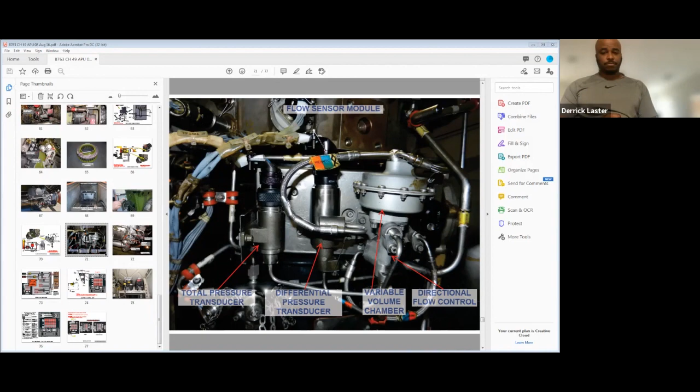Which hydraulic system is the heavy lift system? Center. And what are some of the components that we're dealing with here? Landing gear, yep. Brakes. Alternate brakes. What else? Primary flight controls. Yeah, but that's on all of them. Why is center heavy lift? What else? You gotta run your HMG, the hydraulic motor generator, and the flaps and slats. All right.